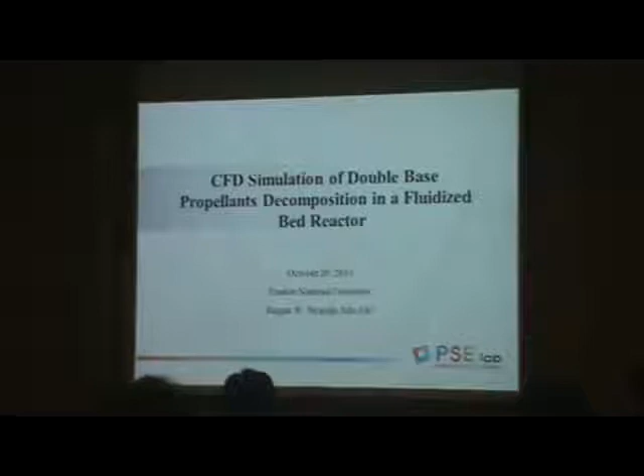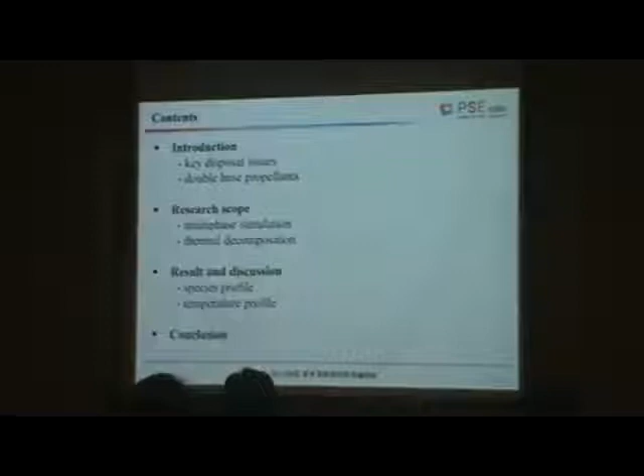I begin with an introduction to the whole decomposition process and key disposal issues. I also talk about the research scope, then my results, and finally conclude.

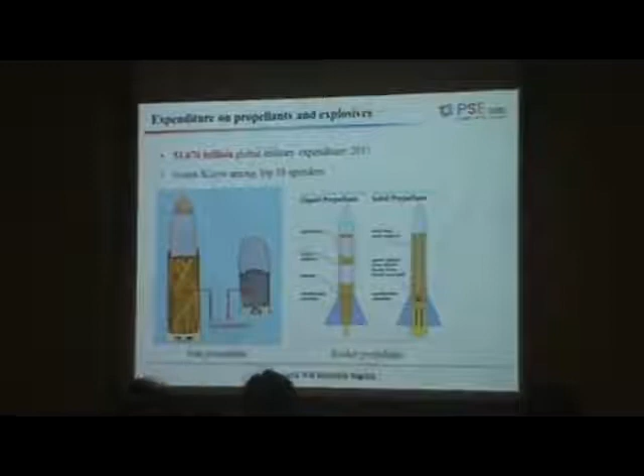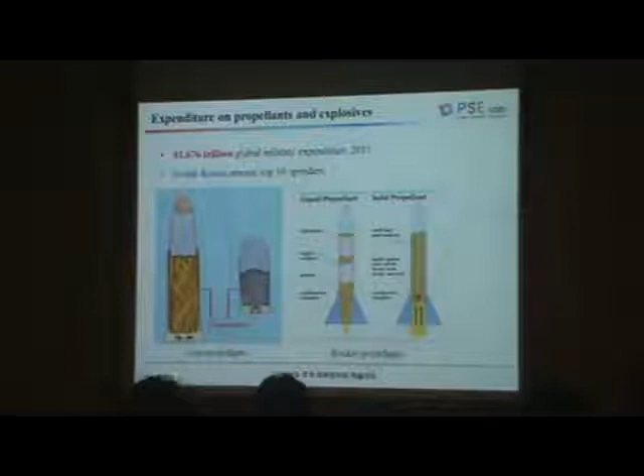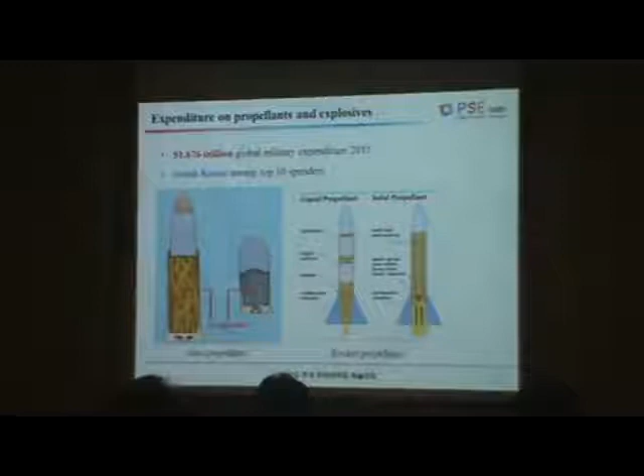We've all heard about military stuff, security and all that. So how much is spent on military each year? According to SIPRI, last year $1.67 trillion was spent globally on military, and when we rank countries, South Korea ranks among the top 10 spenders. A key question is, where does this $1.67 trillion go?

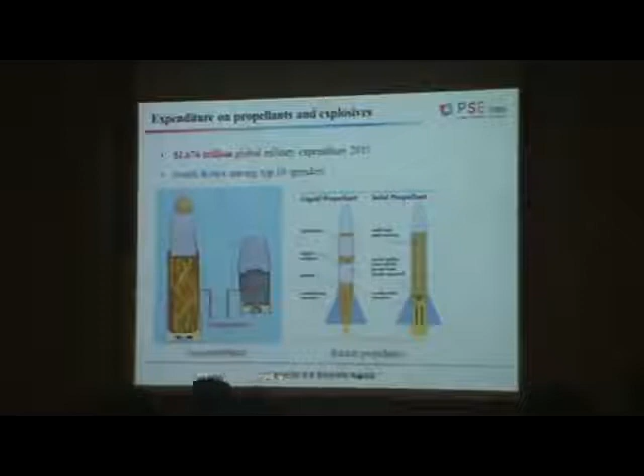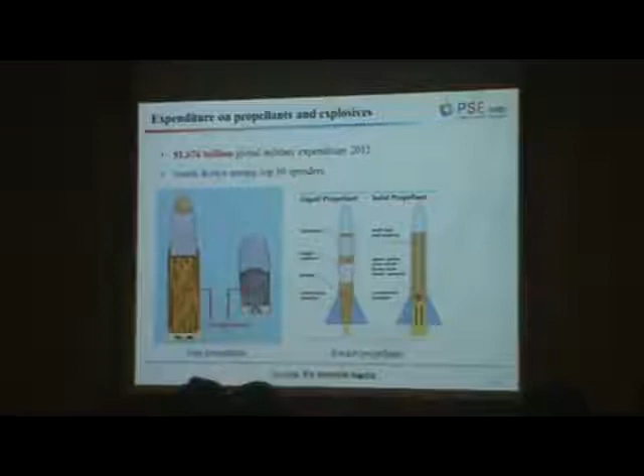Part of the money goes into rocket propellants and gun propellants. With gun propellants, we have nitrocellulose and nitroglycerin as main components. We don't have a problem if we can just use them, but most of the time they are not used, so they need to be discarded over time because they age and undergo reactions.

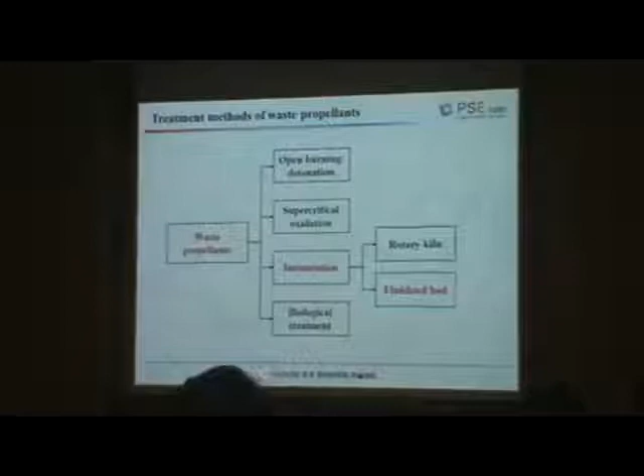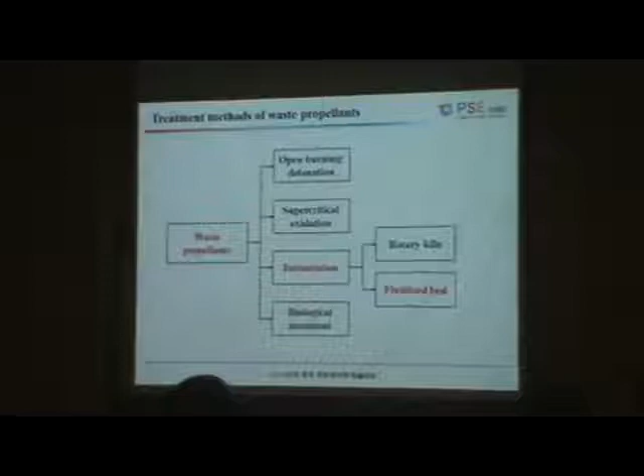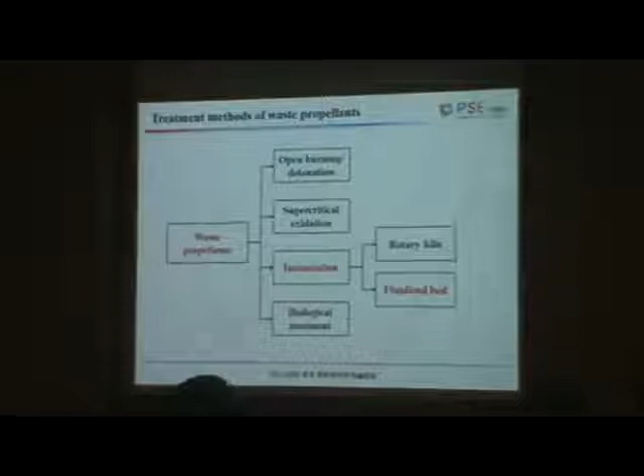What are the methods available for discarding these propellants? With waste propellants, there are a number of ways: open burning or detonation, supercritical oxidation, incineration, and biological treatment. With open burning or detonation, we just put the propellants and set fire to it, but then there are environmental ramifications.

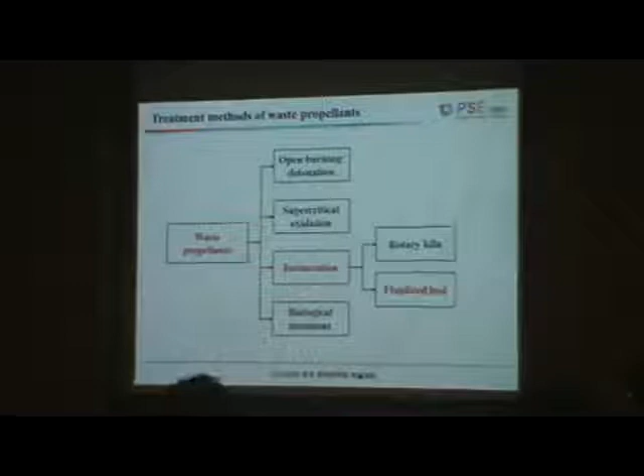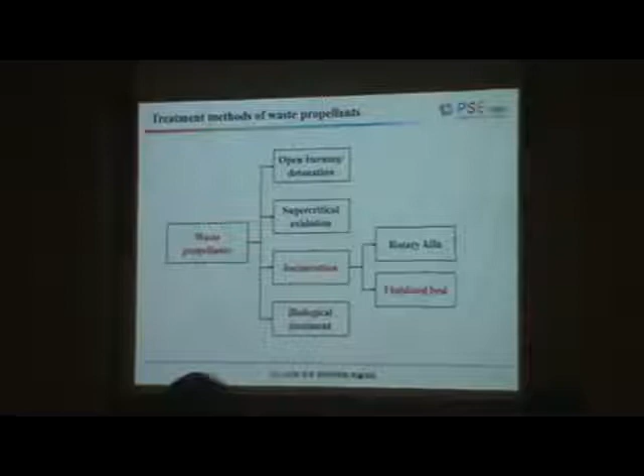With biological treatment, there are challenges because we can't achieve complete denitration, and even with the organisms used, some are pathogenic, so we can't actually use them on an industrial scale. Supercritical oxidation is quite good, but it's still under research. So that leaves us with incineration.

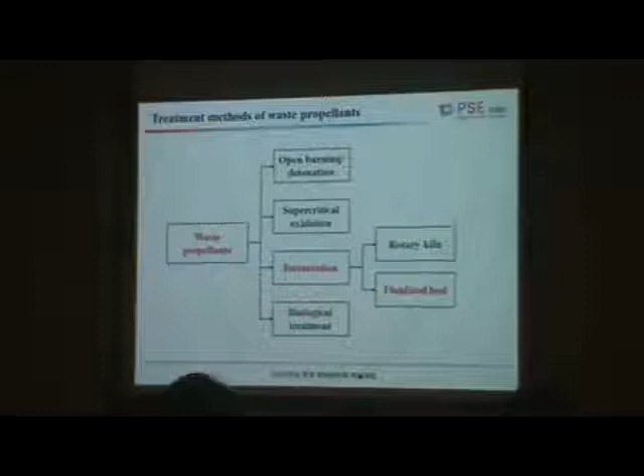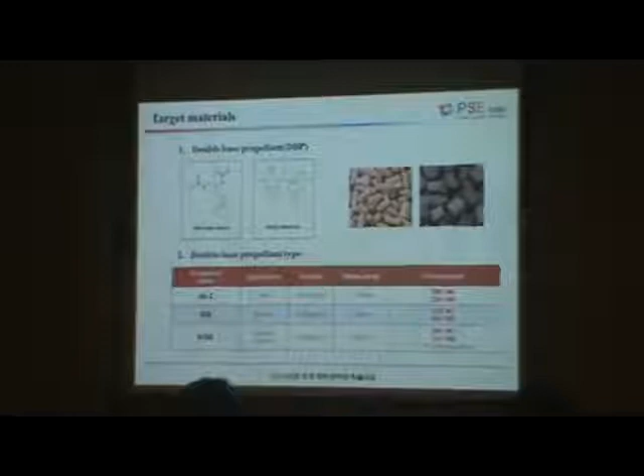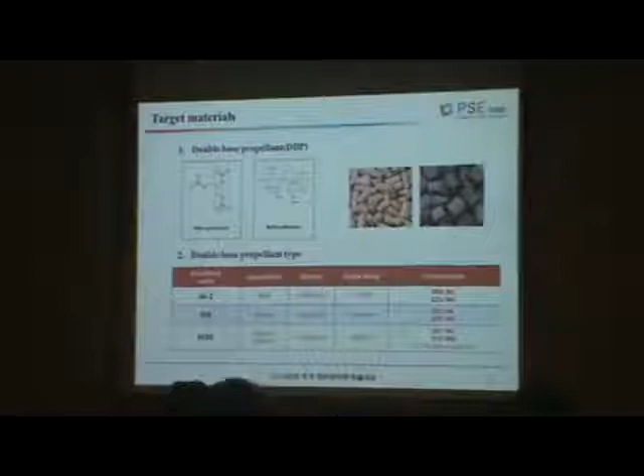In our previous work, we worked on the rotary kiln, so now we are focusing on fluidized bed reactors. Our target material is a double-base propellant, dealing with nitroglycerin and nitrocellulose. Double-base propellants are normally used for M2, M8, and M30, with typical compositions shown here.

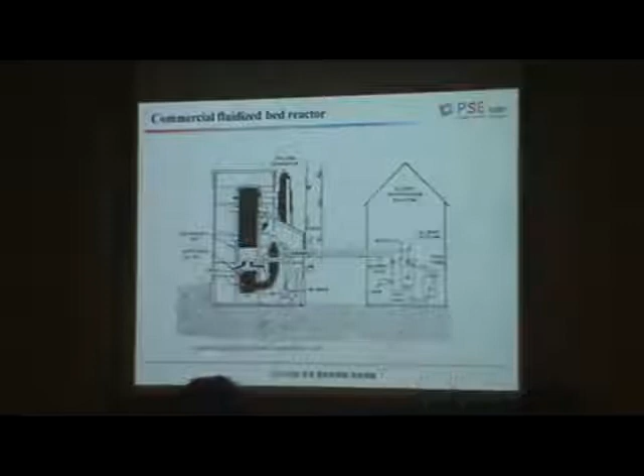Now, over to my research scope. What is the industrial scale or commercial fluidized bed we are considering for application? Our industrial fluidized bed is one pilot scale that has been used by the US Army for treatment of waste propellants. This is what we are considering, and we are carrying out our study on the possibility of double-base propellant decomposition.

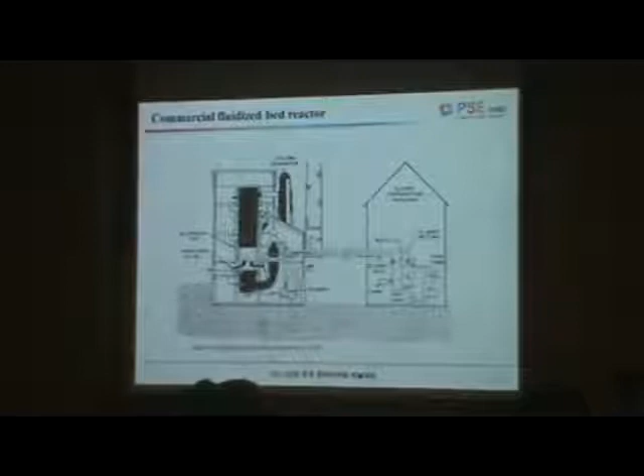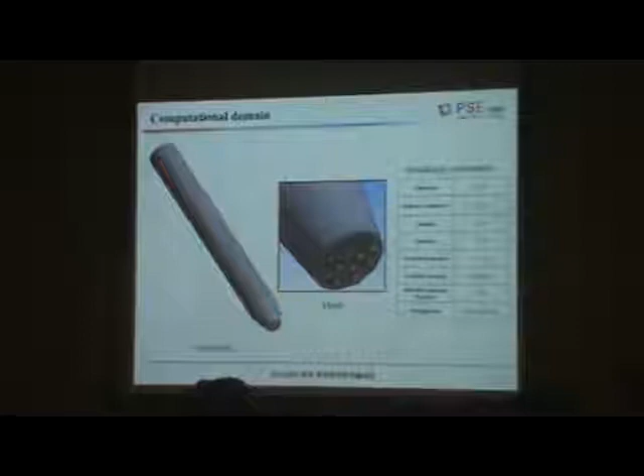When you look at the previous setup, it's too complex for CFD simulation, so we need to simplify the geometry and solve the various governing equations over the domain. This is our simplified geometry, and that's our mesh.

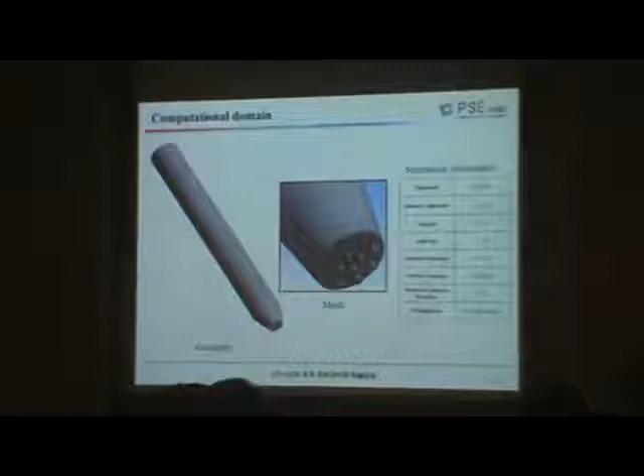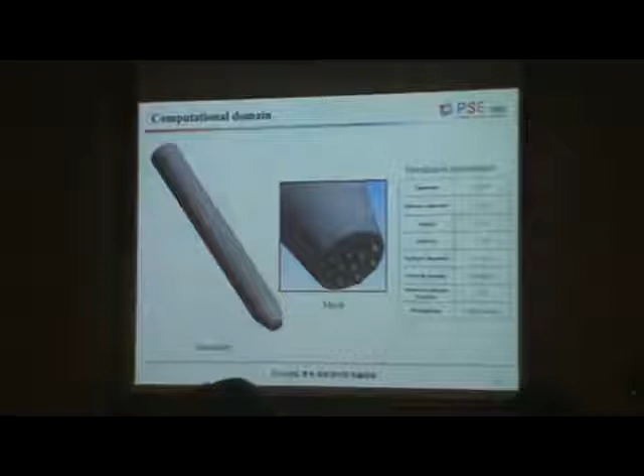What is the multiphase model we are going to use? Obviously it's a multiphase model because we have solid particles and a fluid, so we are considering a multiphase model with an Euler granular model. Our diameter is 2.24 meters, and the velocity we are using is 2 meters per second.

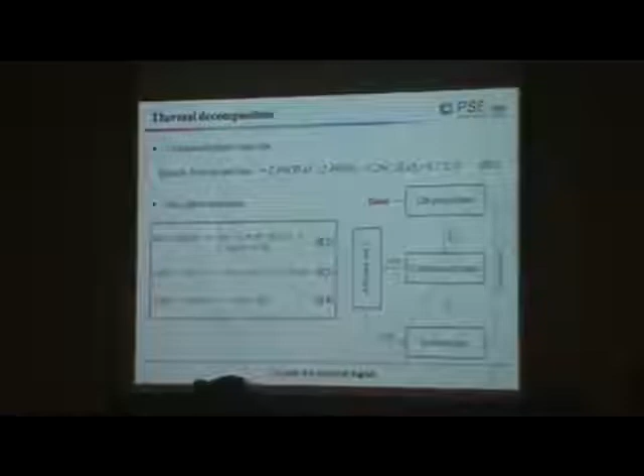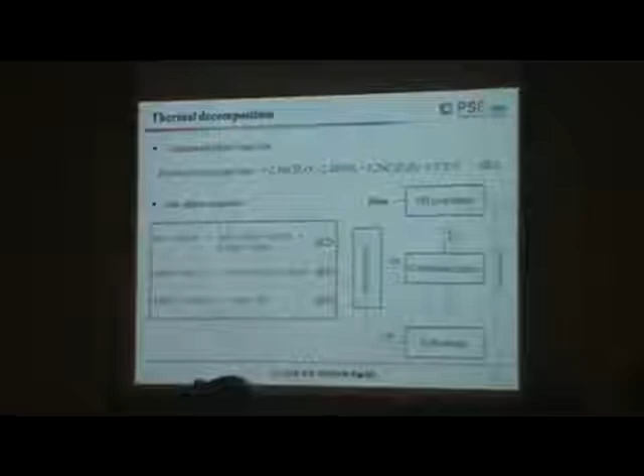It's very fast. With that, the thermal decomposition reactions consist of the condensed phase reaction, shown as reaction 1, and then the gas phase reaction. The decomposition process begins with the application of heat to the double-base propellant. We have gas phase reactions and condensed phase reactions, producing condensed phase products and exhaust gases. There is another part which is volatilization, so we need to consider all this in the simulation.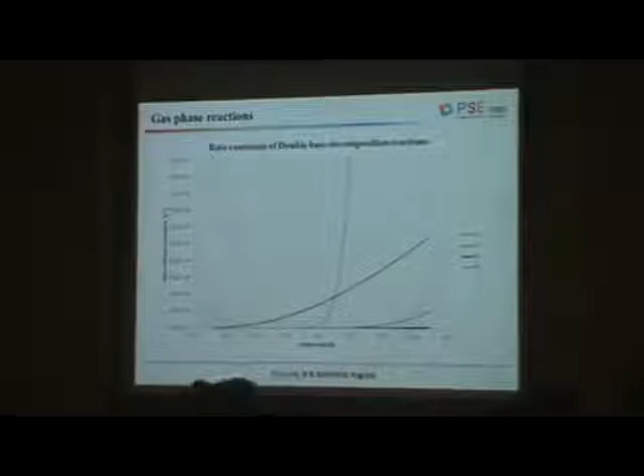Now, with the reaction kinetics, we can see that reaction 1, which is the condensed phase reaction, is highly dominant around 650. That's when the decomposition begins for the condensed phase reaction.

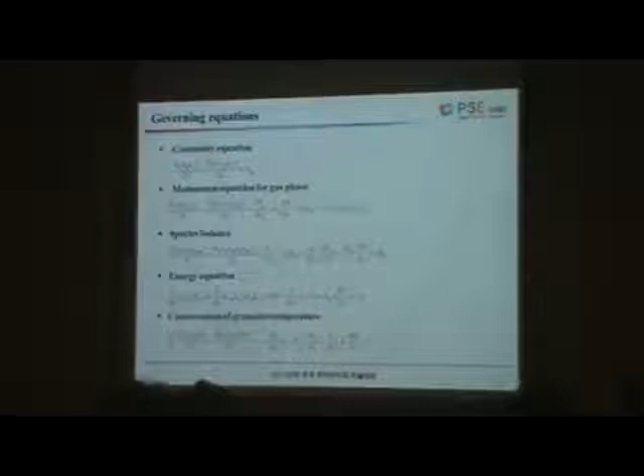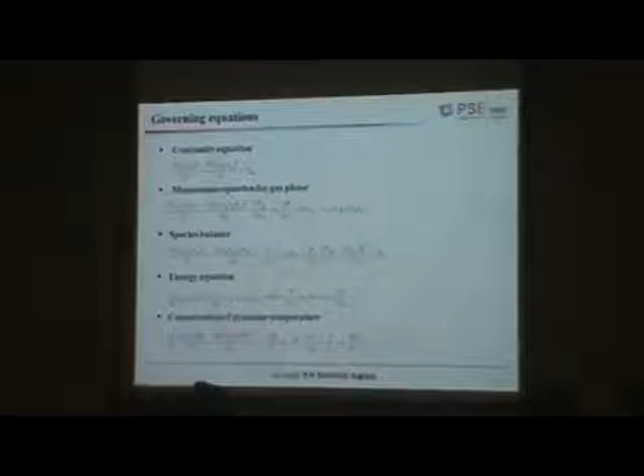Now the governing equations that are being solved are shown here: the continuity equation, the momentum balance, the species energy, and the granular temperature equation. With the granular temperature, we are only dealing with the fluctuation velocity of the particles, because we are treating it in an Eulerian frame, so we need to consider all that too.

So over to the results we've arrived so far. I've shown here the pressure, which is gauge pressure, to the power 4. After 100 seconds of simulation, the maximum pressure occurs at the bottom region of the fluidized bed reactor, as you can see.

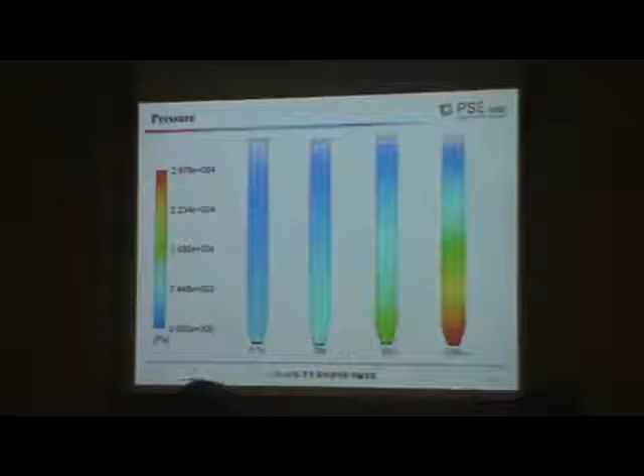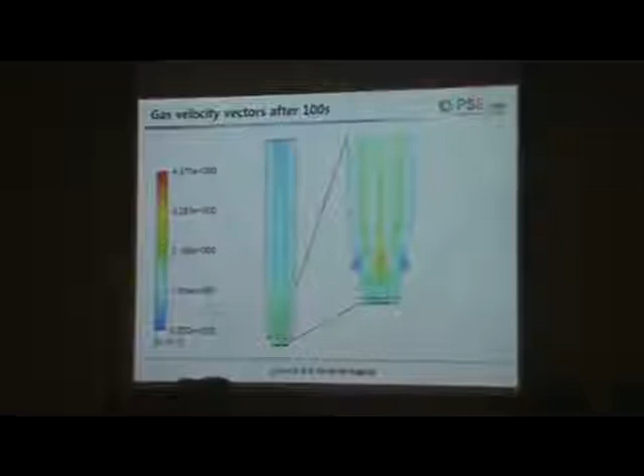Now, what are the particle velocities? With the particle velocities, because of the countercurrent movement of the particles and the gas, we need to look at what is the emulsion gas, what is the gas velocity, and what are the solid velocities.

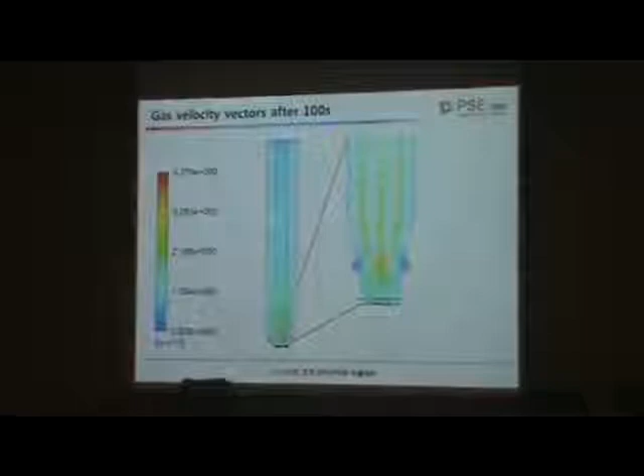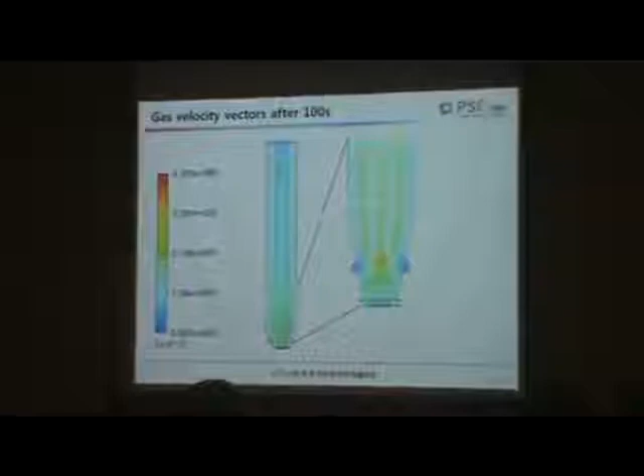So with the particle velocity, the gas velocity is shown here, and you can see that some of the velocity vectors are flowing downwards. That is not what we normally encounter in other reactors, but in a fluidized bed reactor, we should expect to see things like that because of the interaction with the solids.

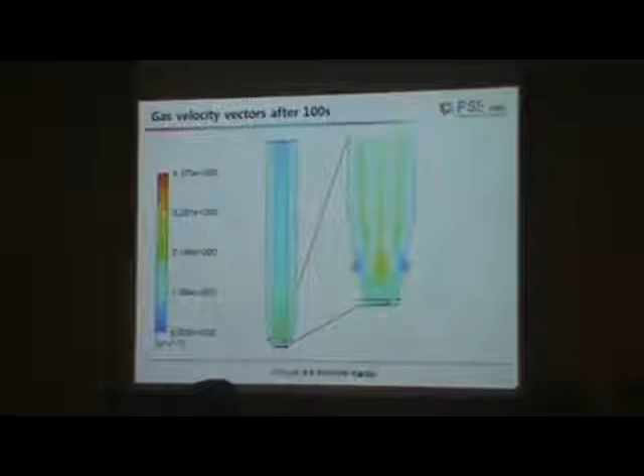Yes, so there is a circulation. That is what is happening in the fluidized bed reactor, with maximum temperature and maximum velocity being 4.375 meters per second.

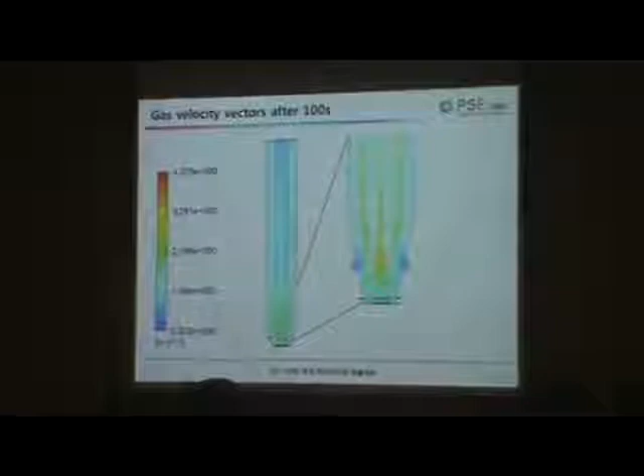Now with the mole fraction, NO2 is one major component. So with the mass fraction here, this is what you can see: after 20 seconds, maximum NO2 fraction occurs.

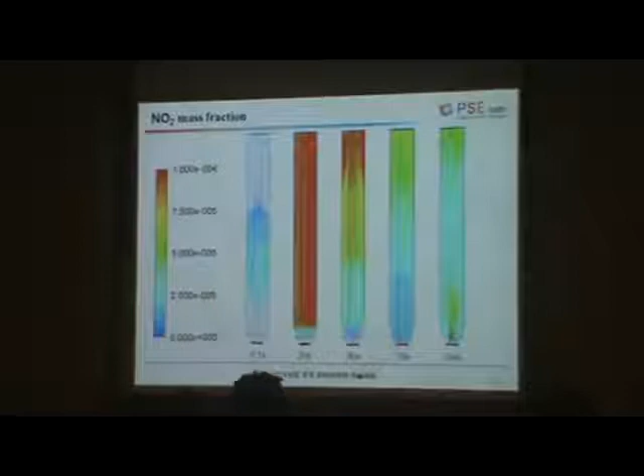And if we progress, you will see that for the other components, maximum mass fraction occurs after 70 seconds. But for NO2, being an intermediate, the maximum occurs at 20 seconds of simulation.

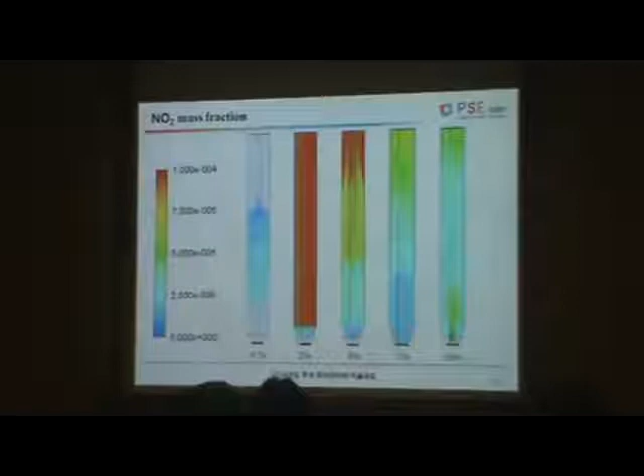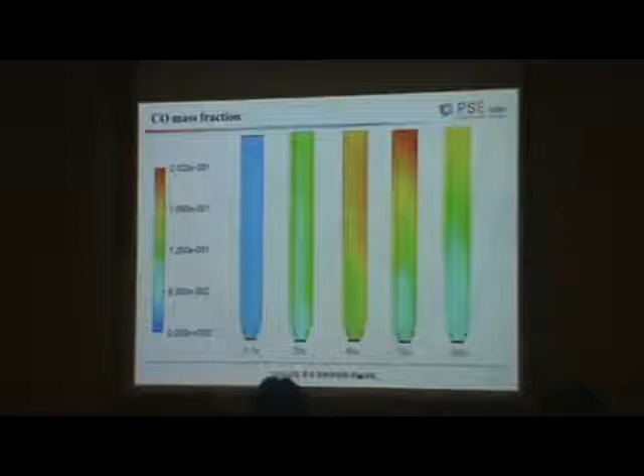So this is what we have: the maximum carbon monoxide mass fraction occurs at 70 seconds and then stabilizes after 100 seconds, with a value of 0.252 mass fraction.

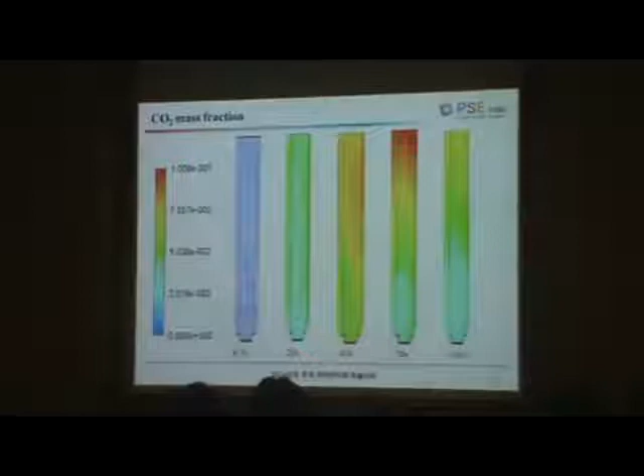CO2 is another major component when we deal with thermal decomposition. The maximum also occurs at 70 seconds and then stabilizes, with 0.1 being the value at that point.

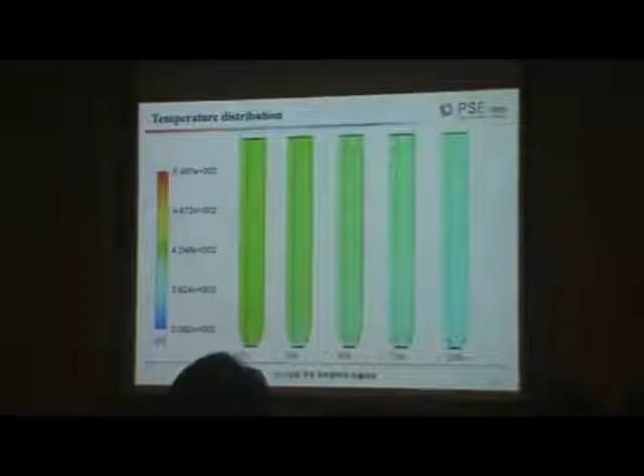Now, unlike what we normally see, the temperature decreases because of the dominance of the condensed phase reaction. The gas phase reactions are supposed to dominate, but when you look at the previous slide, the condensed phase reaction is kind of dominant, so with time it decreases.

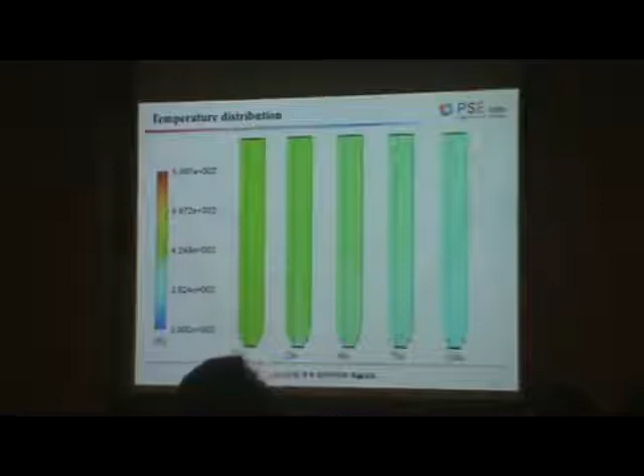And we can see that the maximum temperature occurs in the distributor region, which agrees well with what we know from literature, that maximum conversion and maximum reaction take place in the distributor region.

So with our conclusion, this is what we've arrived at. We've seen that operations can be carried out at 500 and 520 Kelvin without detonation. That is very important because once we exceed a certain limit, around 700 Kelvin, there is going to be detonation. So we can carry that out at 500 and 520.

Now, what we saw is a maximum temperature occurs at 549 Kelvin, when we are operating at this temperature. And then we found also that CO2 and carbon monoxide species fractions of 0.25 and 0.1 compare well with published work.

That's the work of Vigorian. They were dealing with detonation, but when we look at our main species, it agrees very well with it. And we can also see that fluidized bed reactors are well suited for thermal decomposition, if we are able to control the temperature. That's one advantage of using fluidized bed reactors.